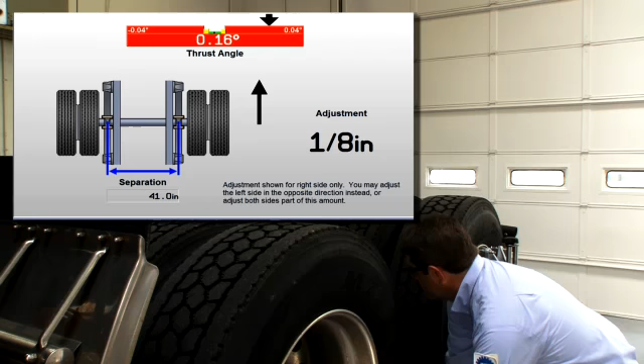Heavy-duty multi-axle alignment is all about correcting tandem scrub at the rear and toe on the steering axle. These are the most common misalignment conditions you see on heavy-duty vehicles. Or this. The drive axles are pointed in separate directions, creating tandem scrub.

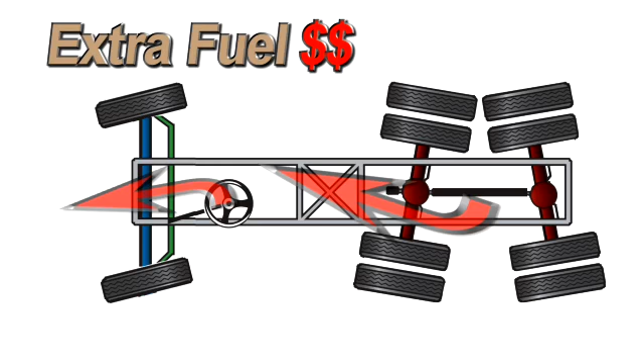Tandem scrub not only causes premature tire wear, but also produces a persistent steering force. To make this vehicle travel straight ahead, the driver has to countersteer all the time. Imagine all the extra fuel and tire tread consumed while this truck is in operation.

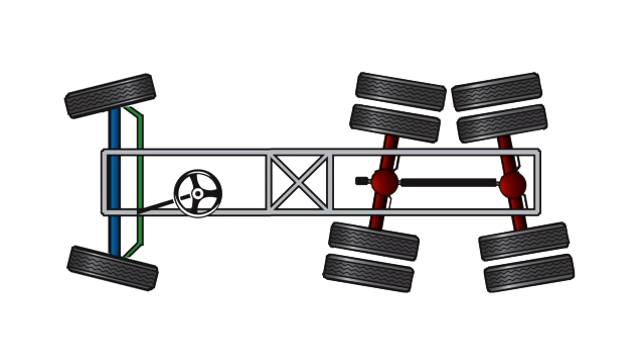Now, imagine this same truck pulling this trailer. To make matters worse, toe on the steer axle is out of spec too. These misalignment conditions are the two leading contributors to increased rolling resistance and accelerated irregular tire wear.

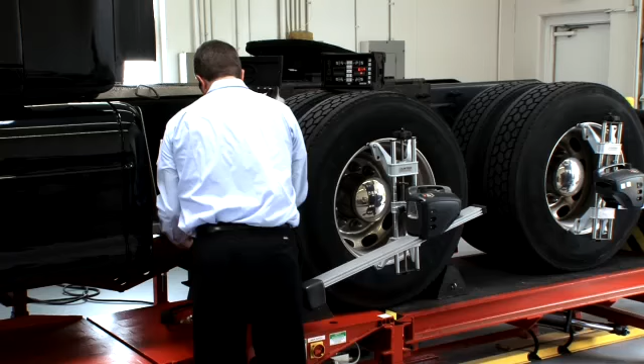With Hunter's heavy-duty alignment technology, the technician has precisely what he needs in one total system to handle correction of these costly alignment conditions, regardless of axle configurations. It's technician-friendly, shop-tough, and profitable. When combined with one of Hunter's heavy-duty alignment racks, even greater productivity can be realized.

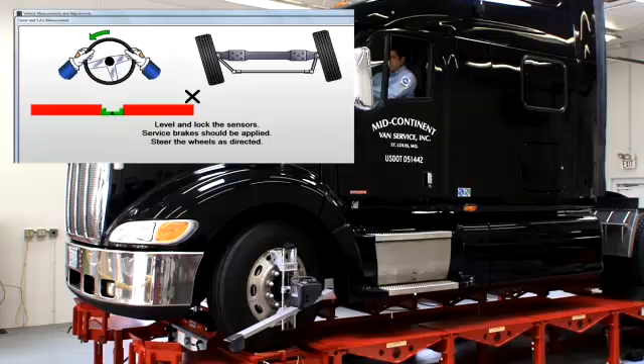Let's take a quick look at the speed and ease of operating the HD system, and then we'll highlight some key features. Begin by selecting the vehicle configuration. This allows the aligner to configure the most efficient procedure and guide the technician along the way. Then, recall specifications.

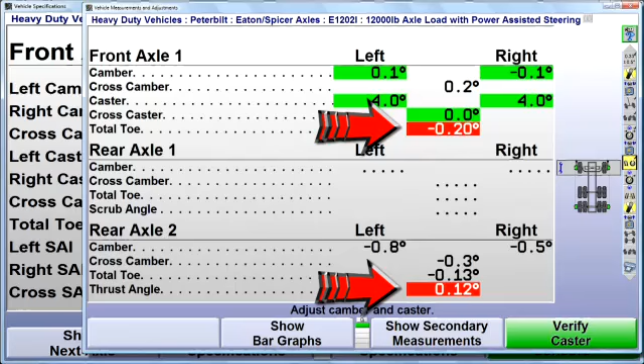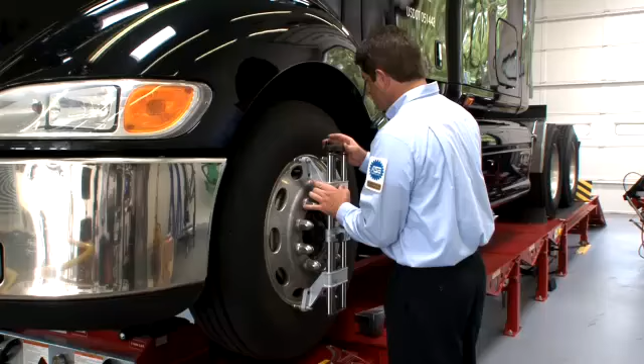Having specs for comparison allows the aligner to highlight which adjustments are needed and provide a live adjustment display to make the corrections easy. Next, the front sensors are installed on the steer axle and compensated. Runout compensation is a simple matter of rotating the wheel in 3 steps and pressing the compensation button at each stop.

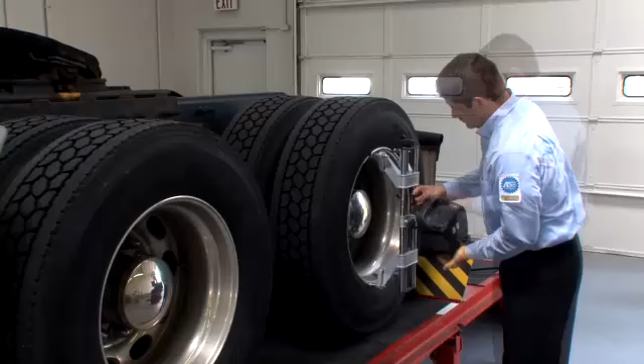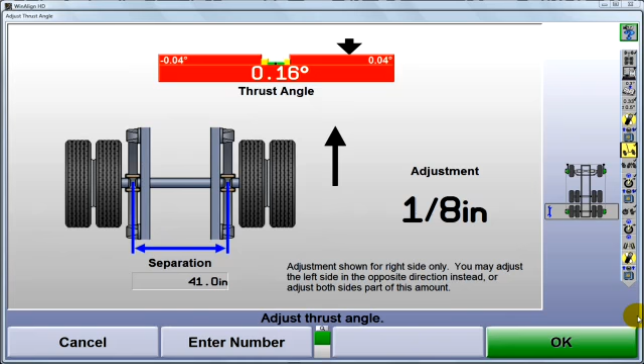Then, the rear sensors are installed on the rear drive axle and compensated. Hunter's wireless technology makes handling the sensors fast and easy. At this point, the aligner looks at the alignment of the rear axle. If it's not straight ahead within tolerance, the bar graph will be red. The position of the arrow indicates the direction it's pointed. In this case, the axle is pointed to the right.

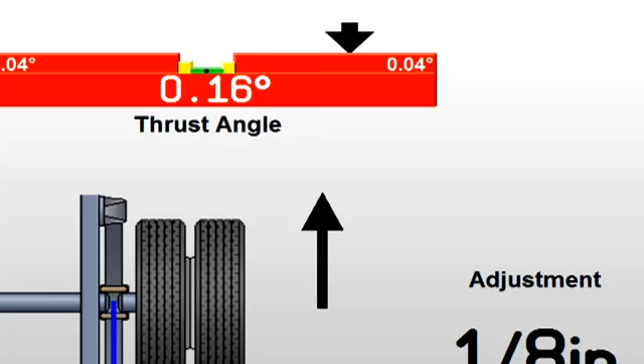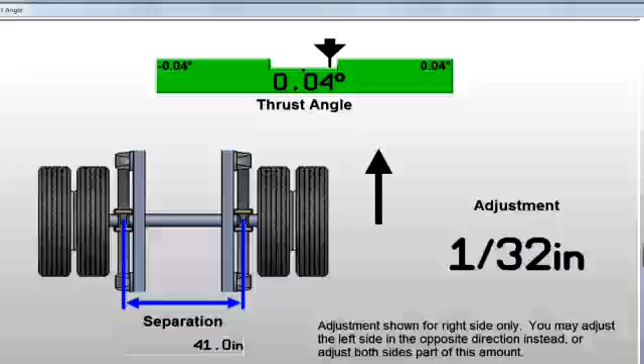If shims are used for the adjustment, the required shim correction is automatically computed and displayed here. This saves time by taking all the guesswork out of shimming axles. While making the correction, simply watch the bar graph. Adjust until the bar graph is green and the arrow is centered in the valley of the graph.

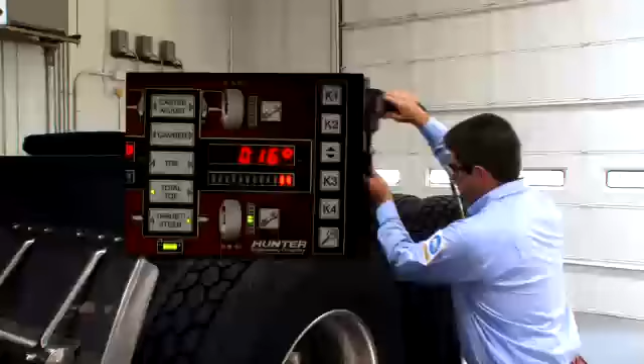The optional wireless remote is very handy for working around these vehicles. Besides observing adjustments, you can control the entire alignment from this single remote. It's exactly what you need, where you need it.

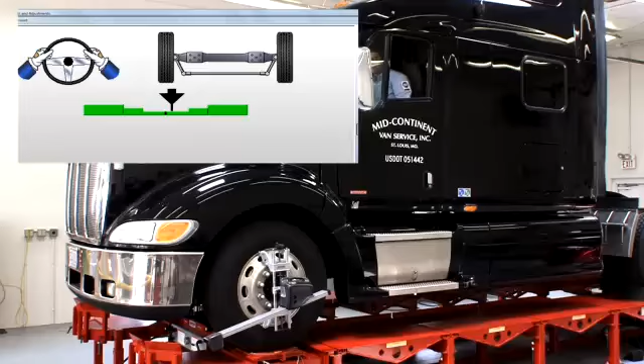The steer axle is next. Caster is measured. Readings are stored and then displayed. On this axle, caster and camber are well within tolerance, but toe is not. This is a very common condition. While viewing the bar graph, adjust to green and center the arrow. Toe correction is fast and precise.

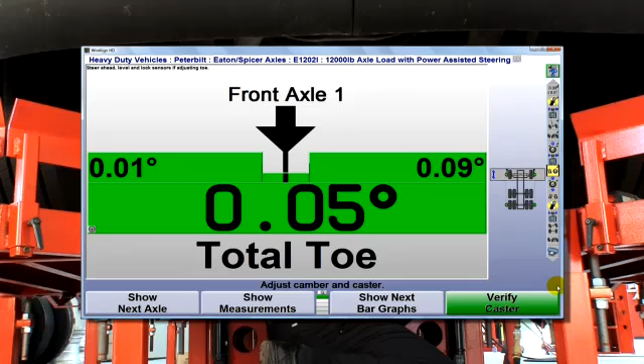To finish the alignment, the front sensors are moved back to the forward drive axle and compensated. The correction is made, and the alignment is complete. In summary, the vehicle came in with this alignment condition: tandem scrub at the rear and a toe error at the steer axle. Now everything is straight, and you can print a report to prove the work was done correctly.

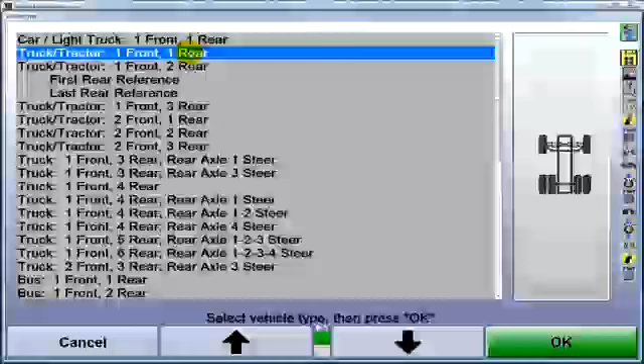To align a multi-axle vehicle accurately and efficiently, the axles should be measured and adjusted in a certain sequence. The sequence is dictated by the number of adjustable axles and their location. By selecting the vehicle configuration first, the aligner will set up and guide the technician through the most efficient sequence for that vehicle. This can mean the difference in getting it done right the first time or a costly redo. Don't assume all of your technicians know exactly what order everything should be done.

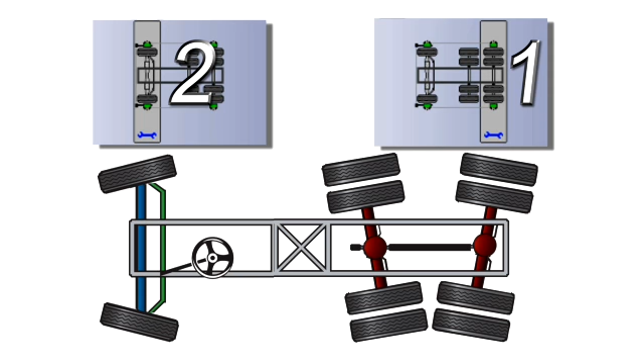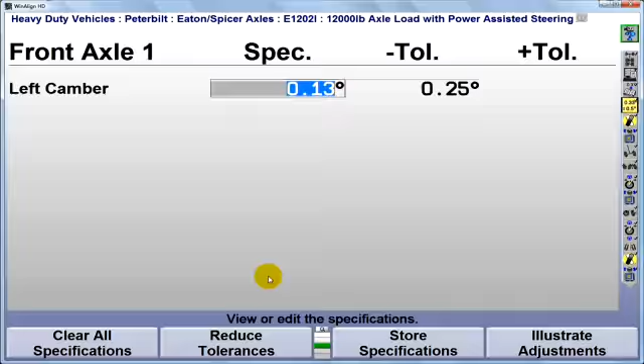Factory alignment specifications are always your best starting point. But we know there can be exceptions. With WinAlign HD, you can quickly edit individual specs, or if required, change everything across the board. If you feel the tolerances are too wide, merely select Reduce Tolerances. Plus, any edited set of specs can be saved for future use. Hunter's Spec Database feature will easily accommodate what works best for you and your customer.

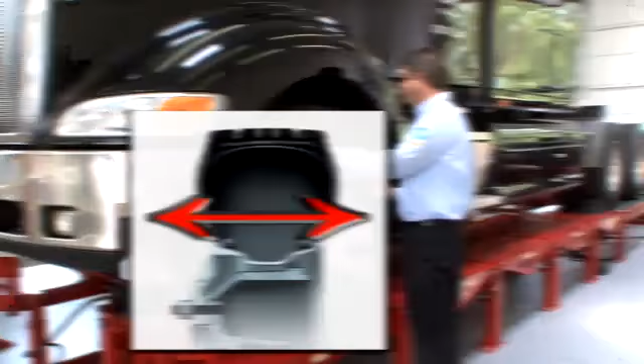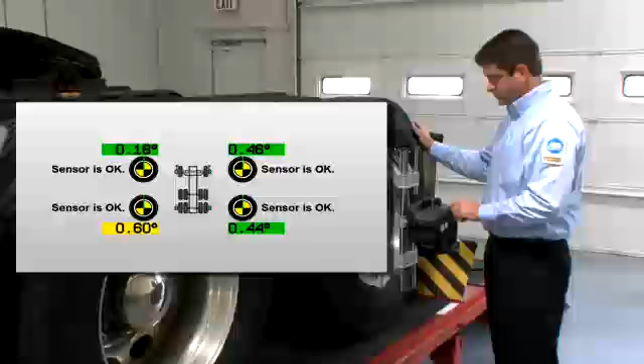Accurate and repeatable alignment measurement requires a reliable reference from which the wheel sensors can measure. That's why when we attach alignment sensors to the wheels, we always compensate for runout. Almost every wheel has some degree of runout. And wheel adapters may contain some degree of deviation as well. If ignored, runout will jeopardize each and every measurement and adjustment. By compensating for runout conditions, we can accurately measure the true end point at the center of the axle.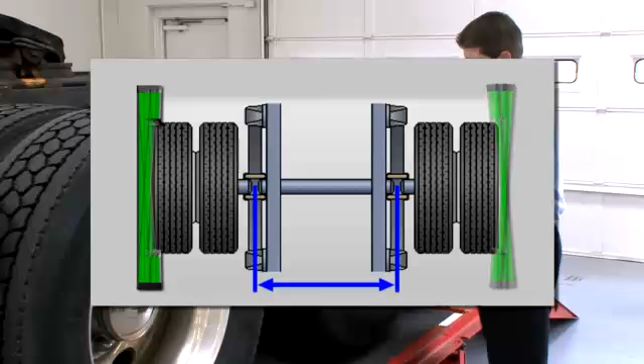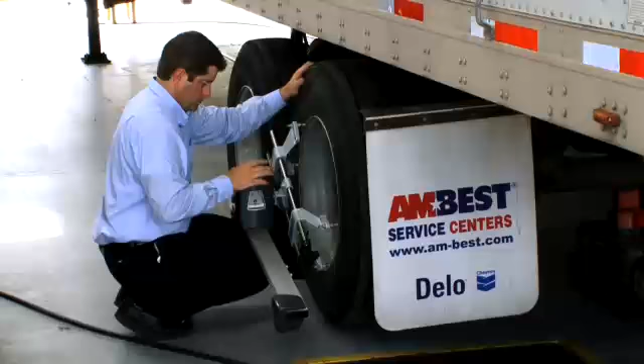Tires typically exhibit even greater amounts of runout. So clamping to or cradling the tires for measurement is especially risky. With Hunter's HD alignment sensors, compensation is easy. Yes, it does cost some time, a minute or two per axle, but this is nothing compared to the time required to fix a comeback.

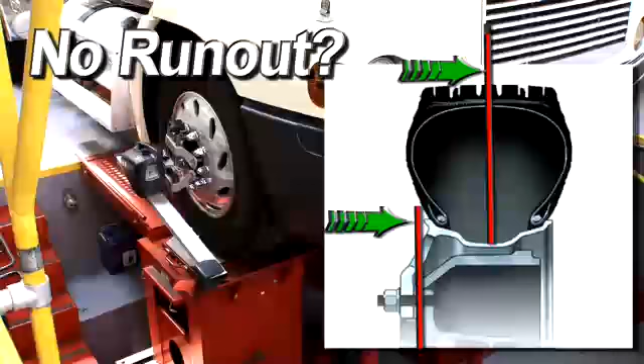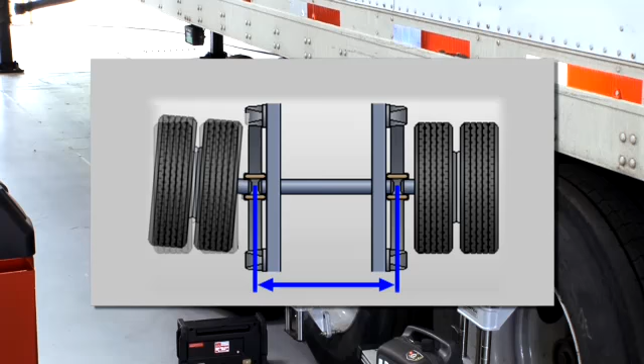Hunter's approach to total alignment is to address the position of the wheels to each other and eliminate stacking errors by not making assumptions. We don't assume the wheels and tires have no runout. We don't assume the frame is straight or square. We don't assume that drive axles or trailer axles have zero toe. And we don't assume that the technician wants to make calculations and interpret measurements.

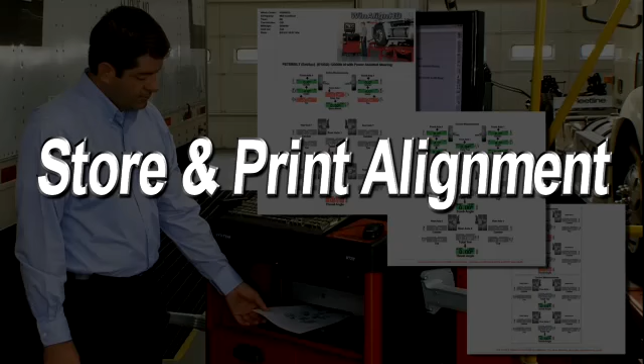WinAlign HD captures before and after readings for all measurements on every axle. So at the close of the alignment, you can print a copy of the work performed. A printed record of every job helps you sustain quality assurance in the alignment bay, maintain records for repeat customers, bolster your professional image, and helps you better sell your alignment service. It also helps instill trust and provides your customer accurate and more complete data for their maintenance records.

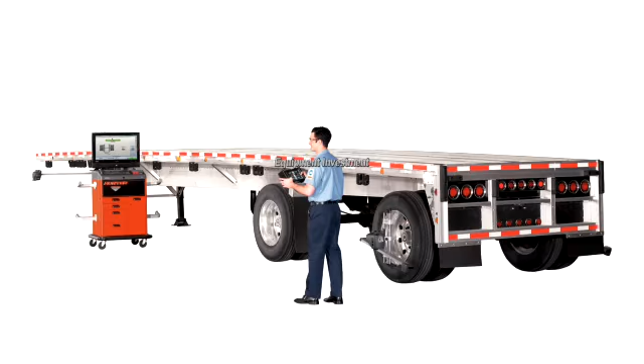When you invest in Hunter equipment, Hunter's commitment to you doesn't stop once the product is shipped. Initial installation, calibration, and on-site training is just the beginning of the kind of support you can expect. With more than 300 factory-trained service representatives, you can rely on fast, local support.

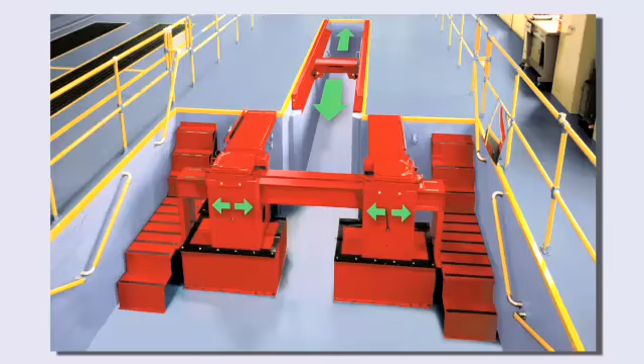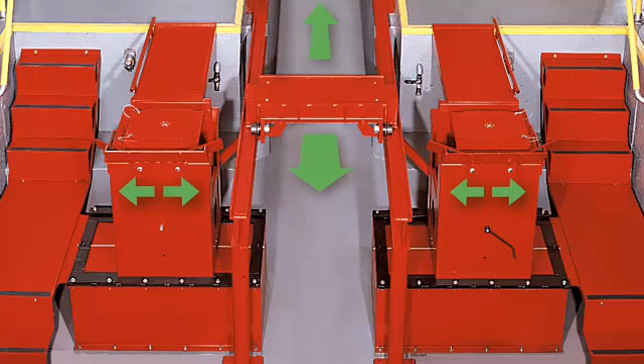To expand your alignment and wheel service capabilities and step up productivity, add a heavy-duty rack system to your alignment bay. Unsurpassed for versatility and access to vital work areas, Hunter's heavy-duty pit rack configurations will make your alignment bay one of the most profitable in the shop. Adjustable front pedestals maintain a solid level surface for accurate measurement of any angle on the steer axle. Plus, the technician can stand upright to do the work. Removable bridge runways provide more complete access to steering and suspension components.

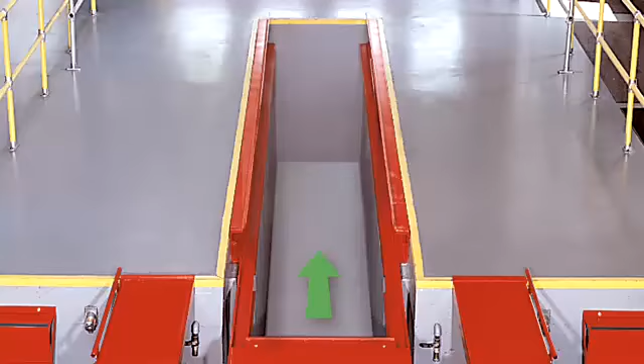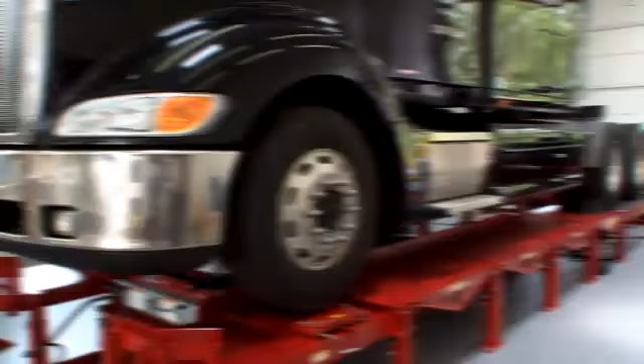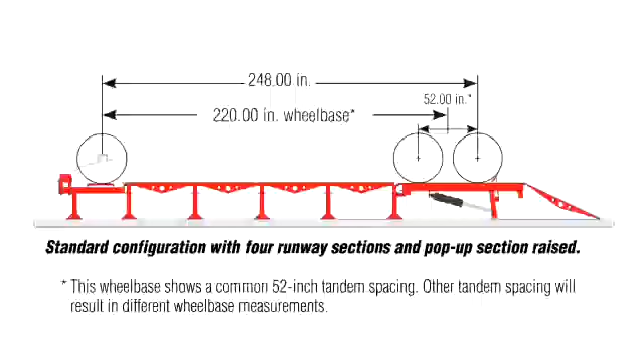To streamline work at the rear, choose the T-pit configuration. Add the optional pit jack, and this premium alignment platform is complete. For a lower initial investment, set up your bay with the surface-mounted heavy-duty power rack. This modular rack system gives you the level and stable alignment surface you need, a more efficient working height. Plus, sections can be added for increased wheelbase capacity. This system can also be configured in a shallow pit for custom installations. The heavy-duty power rack is ideal for 3/4-ton trucks, all the way up to Class 8 vehicles.

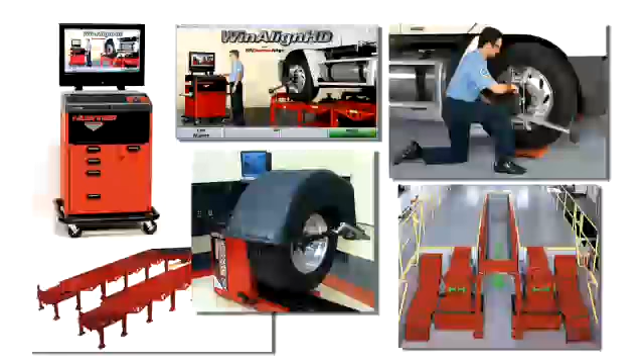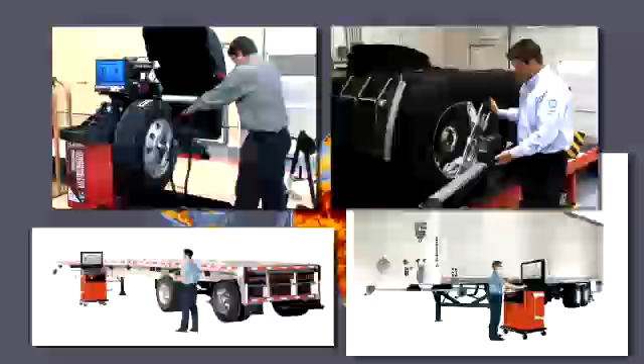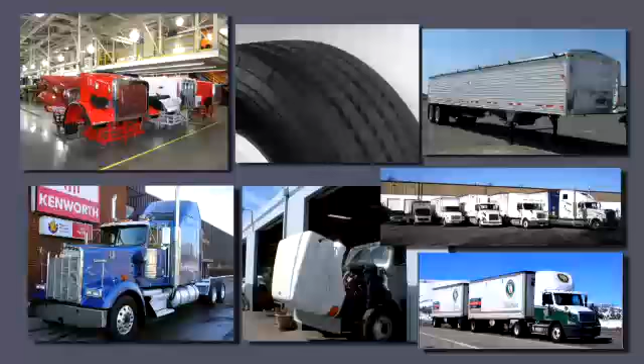Hunter Engineering Company has led the wheel service equipment industry with a remarkable number of innovative products for more than 5 decades. Headquartered in Bridgeton, Missouri, Hunter operates 4 U.S.-based manufacturing facilities to provide the latest in wheel service equipment technology. Shipping to customers in over 70 countries, our reputation is worldwide. Some of our customers in the heavy-duty market include truck manufacturers, trailer manufacturers, tire manufacturers, dealers, fleet operations, and countless independents. With this in mind, you can feel confident equipping your shop with industry-leading, cutting-edge technology.

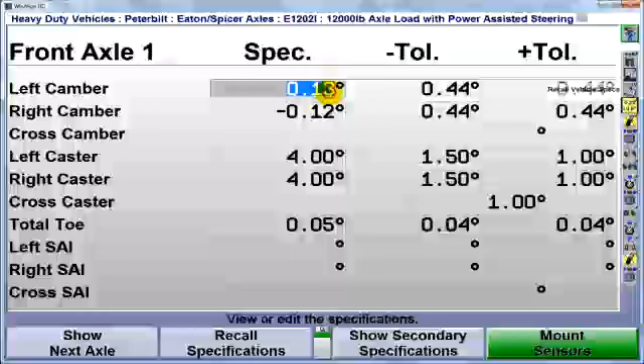Before you make a decision, we suggest you put together a checklist to see how every product considered stacks up. Will it provide factory specs and tolerances for comparison? Can individual specs and tolerances be edited? Can you enter your own specs and tolerances? And can all changes or additions be saved and recalled for future use?

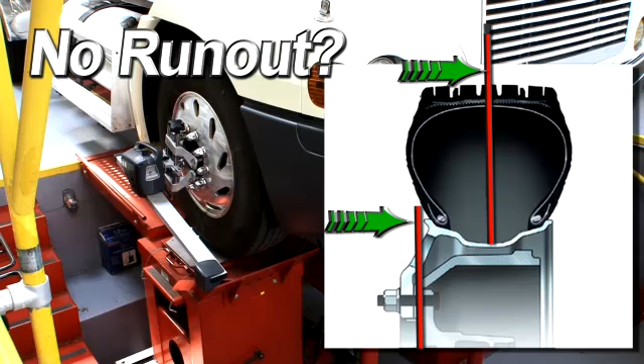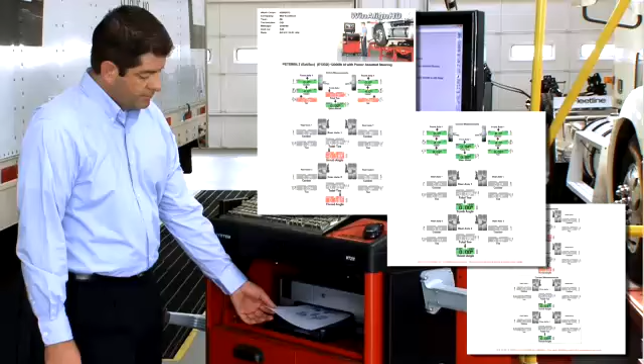Are you forced to assume that wheels, tires, and frames are perfectly true? Is the software smart enough to configure the most efficient alignment and guide the technician through the procedure? Can you print before and after measurements to document the work performed? And, most importantly, is the aligner truly a total system, allowing measurement and correction of all axles front and rear?